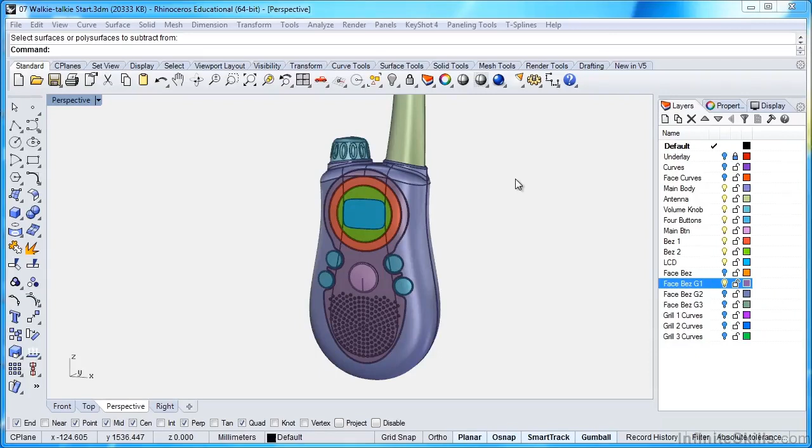In this lesson, we're going to take our existing grill designs and add a little more detail to make them a bit more realistic. If I zoom in on the grills we've created and Control-Alt-R to render these, you can see they look pretty good. But what's missing is a filleted edge on these parts.

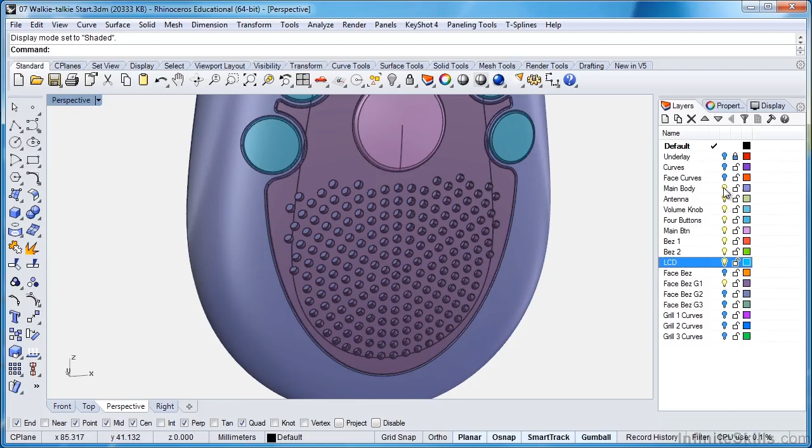We're going to look at applying that to a whole group of things in this lesson. Go back to my shaded mode. I want to switch all the layers off except for the face bezel layers. So I highlight the LCD layer here, hold down Shift, and click on the light bulb on main body, and it switches the light bulbs off for everything all at once.

Now I really like this face bezel G1, and I really like the G3 bezel with the offset of the rows. I don't really care for this grill here, so I'm not going to develop this one any further. I'll just move that down my list. And sometimes what I'll actually end up doing, after moving this face bezel down, is make another folder.

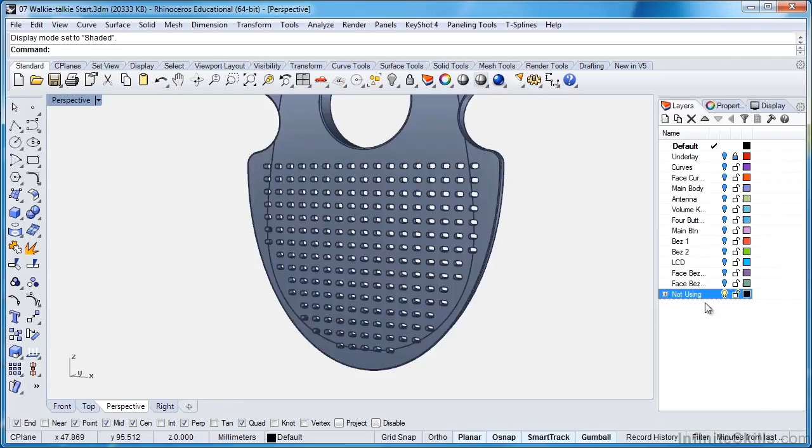Sometimes your layer list gets a little long and unwieldy, so I'll make another folder and put all the parts I'm not using in there, which makes it a little easier to work. I'll just call this one 'not using' - not a very catchy name, but it lets me know what's in there. So I can drag all the layers I'm not using in there, and when I switch that off, everything disappears. Now I could do the same at this point.

I'm kind of finished with a lot of this stuff, so I could go into underlay, curves, and face curves and drag those down to not using as well. Now I've really cleaned up my work area. Drag that over just a bit so you can see the names. So now if I want to switch everything on, I can hit that light bulb, hold down Shift, click on that light bulb, and everything comes on all at once.

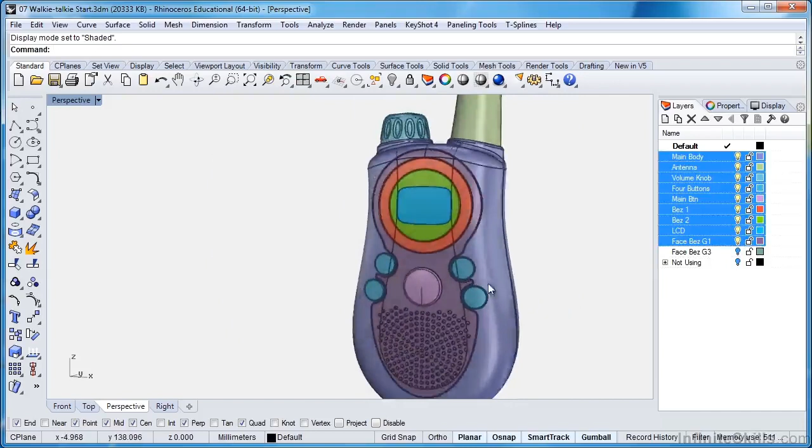Switch those all off. So as I said, G1 and G3 are the face bezels that I'll move forward with. What I want to do is put a fillet edge on these holes. Obviously there are a lot of holes in this surface here, so I want to do them all at once rather than having to do them individually. That's quite easy to do.

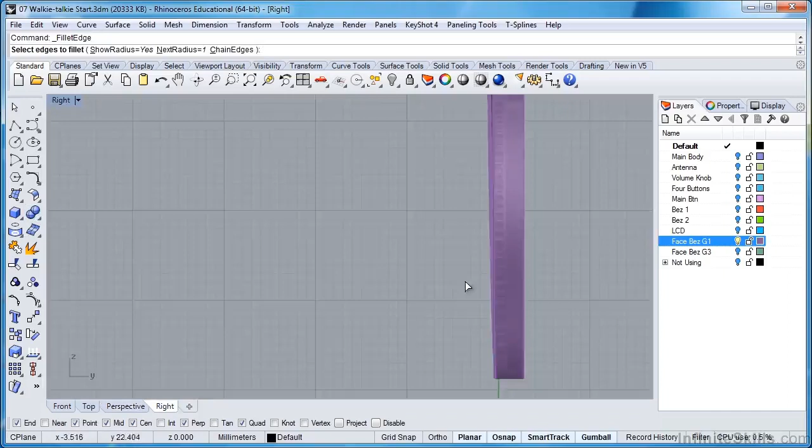What I'll do is go over my variable radius fillet. I'm going to go into my right view, and drag a box just about there. Go back to my perspective viewport. Notice I only dragged far enough to get the front edges of these boxes - I didn't grab the back edges of these boxes.

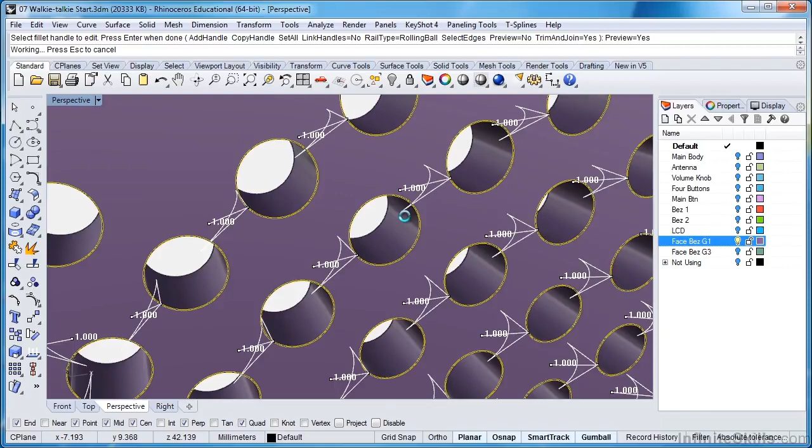Now I know for a fact that 1 millimeter is not going to work on these. Hit enter anyway just to look at it exploding here. If I switch on my preview, we should see these all failing. Keep in mind we're only putting a fillet on the very front edges of this face bezel, and you can see we got a lot of overlap. Everything's going to fail on this, as I knew it would for that size.

So I'll go into Set All, and let's try a 0.2 millimeter, and we'll see what we get. It does take a few seconds for Rhino to generate a preview of this. And if I zoom out, I don't see anything going off into space in a weird sort of way. So that's a good sign.

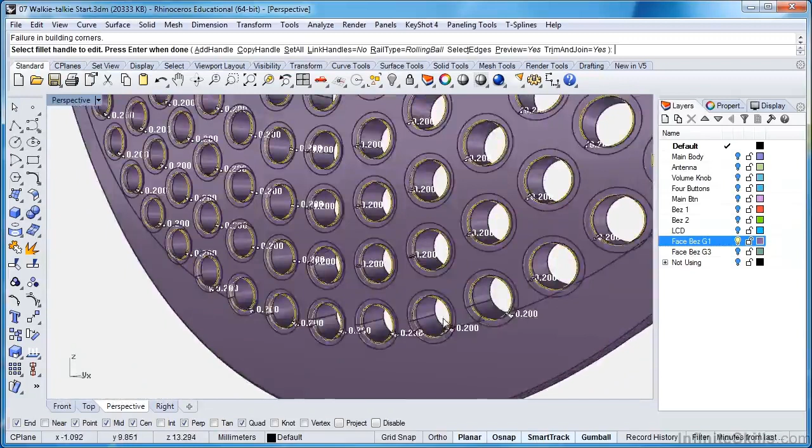Now, when you're doing this many fillets, and this is a fairly complex surface, what I'm really worried about is how the fillets will do as they go around this edge here, where we have two different surfaces coming together. Those are going to be the tricky parts on this particular one.

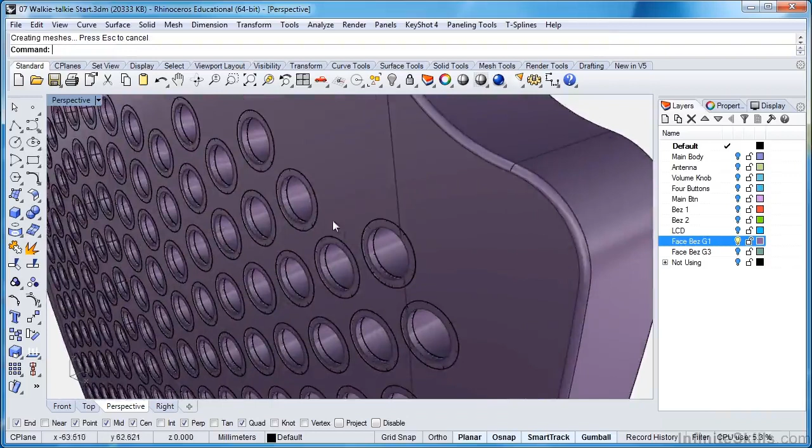Let me hit enter to apply this, and then we'll see what we get. And unfortunately, that didn't work. You can see, because it hasn't filleted these nice and cleanly, there was something about one of these it just didn't like. So unfortunately, our select all option is not going to work in this particular instance.

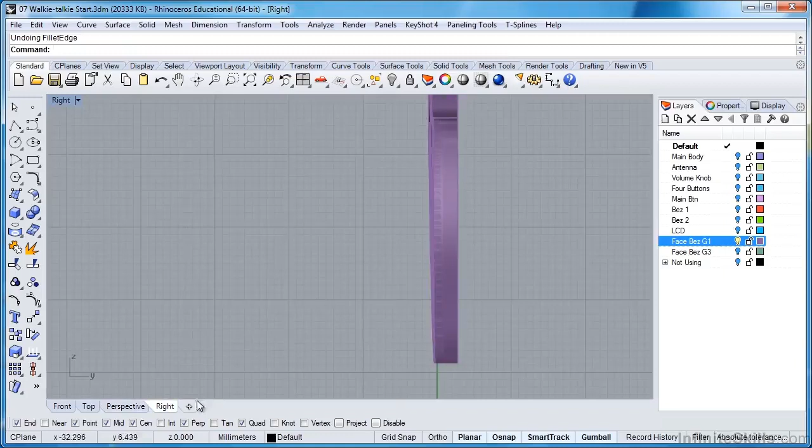So let me undo this. But I can approach this a little bit differently. So I want to be able to select as many as I can at once. I can't do that from the side view and exclude a bunch. I can do that from the front view, but if I grab in this front view, I'm also going to be grabbing in the back.

So if I just extract these back surfaces here, so I'll right click on the explode icon. I've extracted that. I'll join it together. Then I'm just going to lock that so I don't accidentally do anything with it.

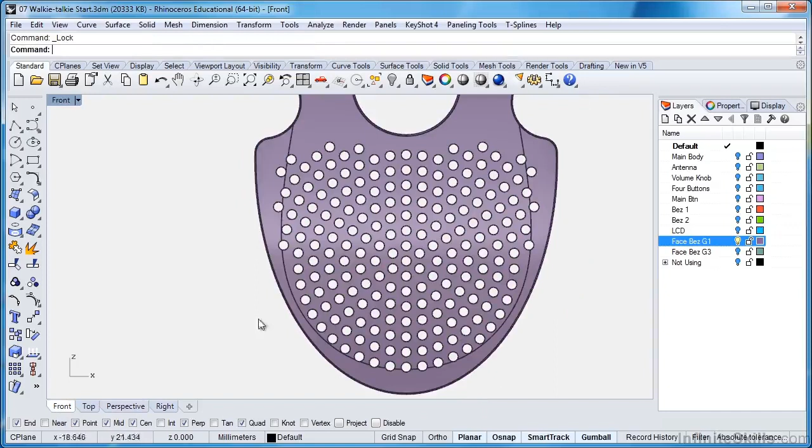Now I can go on my front view, I can apply my fillet again, and I can kind of drag a box around parts. The only thing I have to do is make sure that it does select all the parts I want. So I think most of these that are away from these surfaces are going to work pretty well.

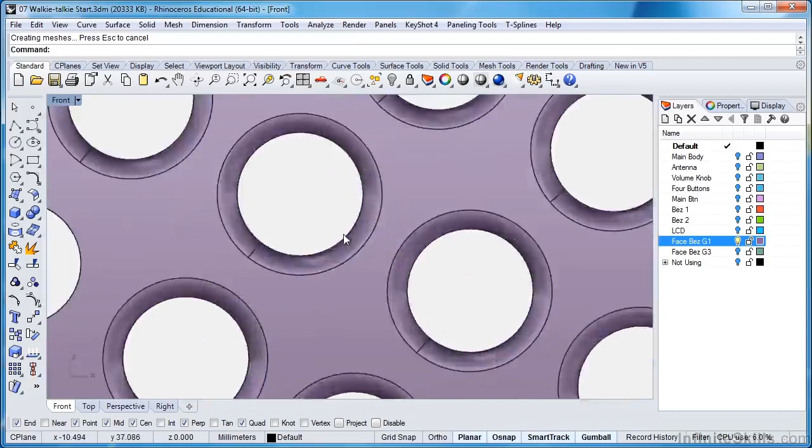Let's see what we get when we apply these. Yep, and those all worked. If I go to my perspective viewport, you can see what we have there, and if I render this, now you can really see the difference. And that's why you want to add these, because you get such a nicer look to this surface. It's much more production realistic.

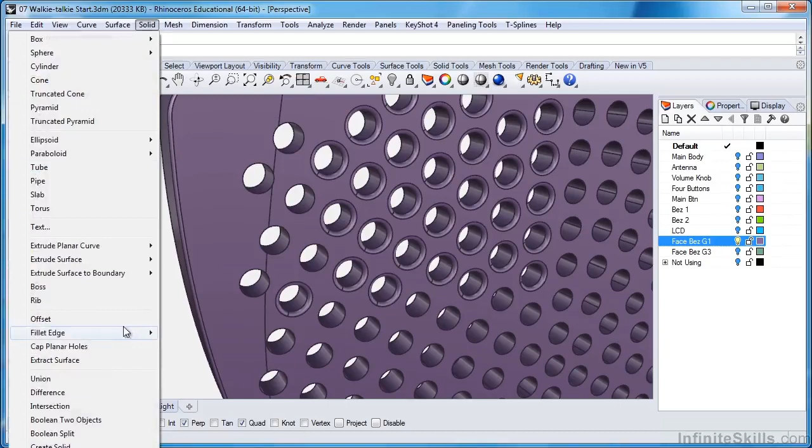So unfortunately, that means we've got to kind of go through all of these and individually apply them, or apply them in groups. Solid, fillet edge, remember that's the same command. Hit chain edges. Now what I may do is just try a few of these edge ones and see if I can find kind of the culprit that was making everything else fail.

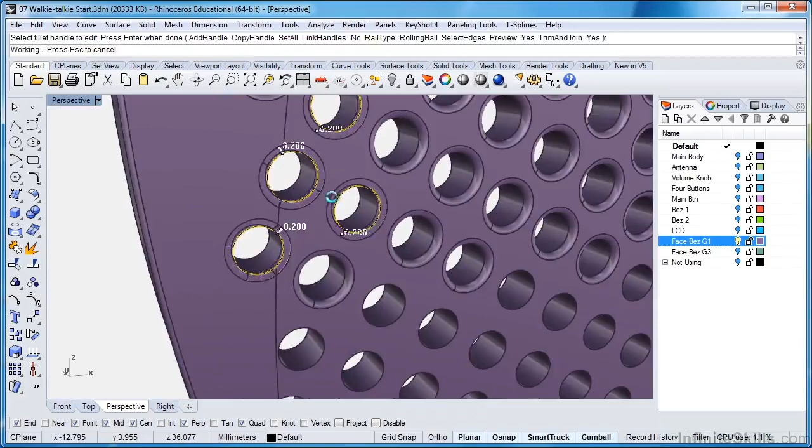And those ones seem okay. Just a little piece like that is what made everything else fail. And notice that failed right there.

So let me try this. That's going to work. Try this one. That one works. That one doesn't. That could be what failed everything.

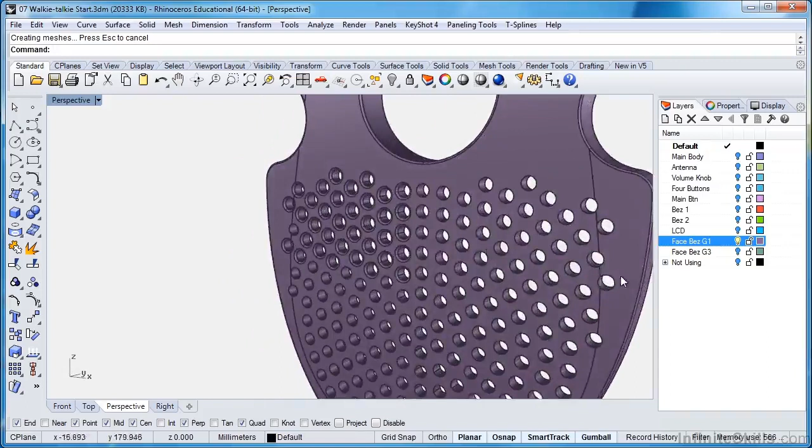And let me try this and see if that works for us. So that one doesn't seem to work. Let's find its mate on the other side. And that would be this one right here.

Sometimes, for whatever reason, you'll find the left and right side of an object, even though they should be symmetrical, will work differently. And you can see that one doesn't work on that side either. So that's good to know. Makes more work for us, but it's good to know. So let's apply these and see what we get.

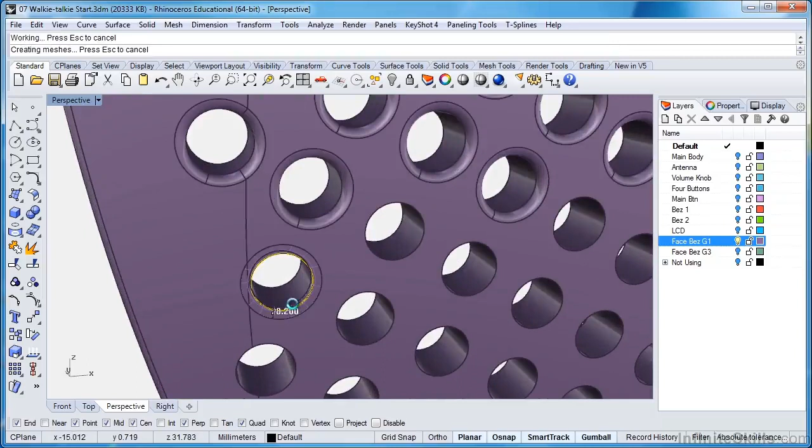Now we've identified the problem areas, let's finish adding the rest of the fillets in the next lesson.